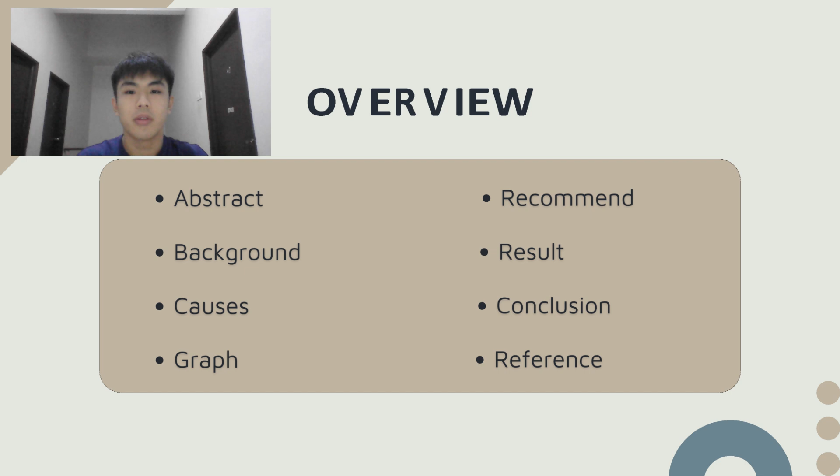Let me briefly explain our report on the I-35W Bridge collapse in 2007. The main causes were weak gusset plates, lack of backup support, too much weight for repairs, and poor maintenance.

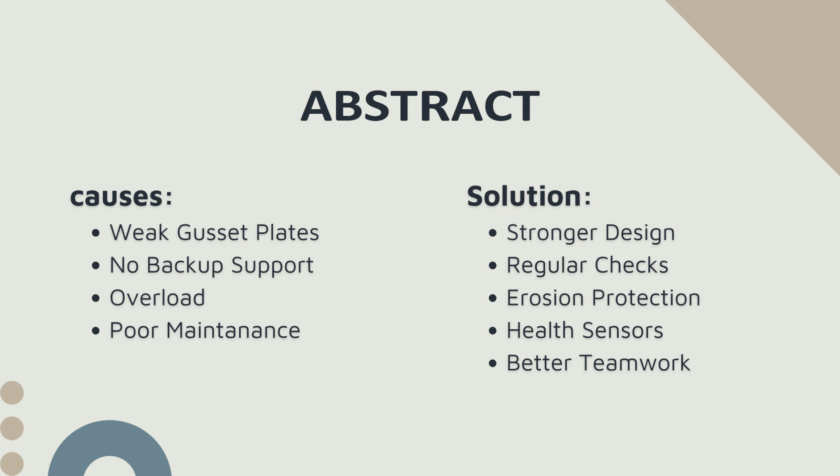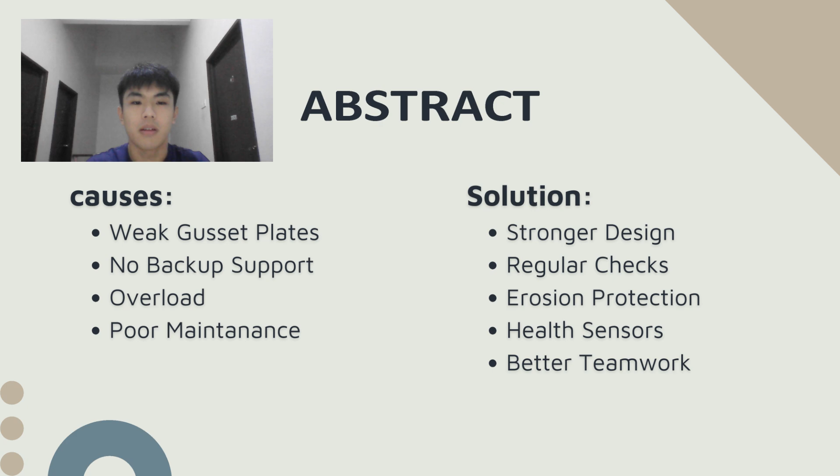To prevent similar failures, we recommend a few key solutions. First, use stronger and safer structural design. Second, perform regular inspections to catch early signs of damage. Third, protect bridge foundations from erosion and install sensors to monitor bridge health in real time. Lastly, improve teamwork between agencies for better decision making.

Highway bridges are essential to modern transportation systems. They must remain in static equilibrium under different types of load, such as dead load, live loads, environmental loads like wind or temperature change, and sometimes even construction load. If these forces are miscalculated or misplaced, the bridge structure can become unbalanced and fail.

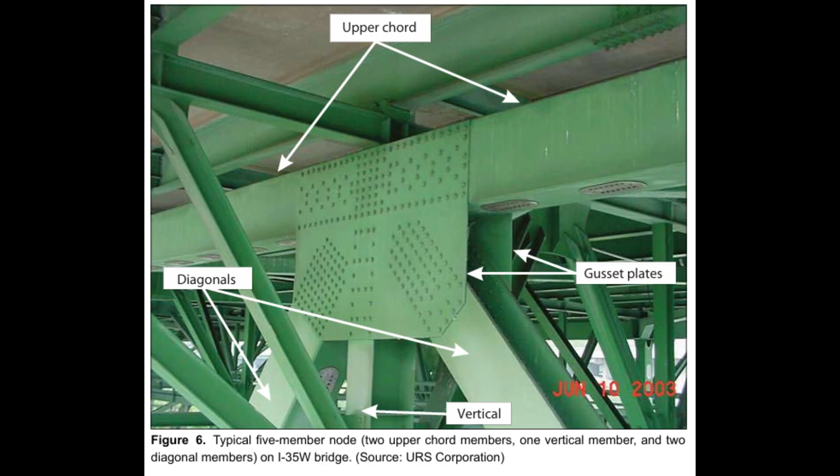A tragic example is the Interstate 35W Bridge collapse in Minneapolis on August 1, 2007. This steel deck truss bridge was 1,907 feet long and carried 8 lanes of traffic. It served over 140,000 vehicles per day, making it Minnesota's third most used bridge.

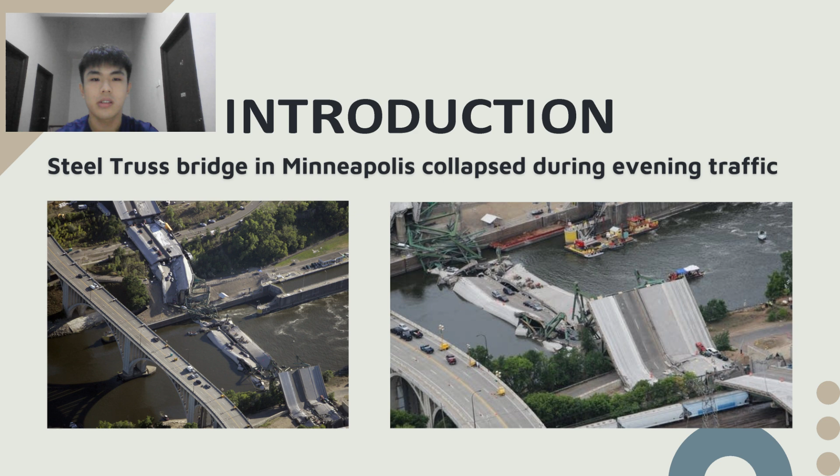On the day of the collapse, a construction crew had closed 2 lanes and placed heavy materials like sand and concrete on the deck for repairs. This added weight, combined with live traffic and the bridge dead load, caused excessive force at a critical joint known as U10.

This joint had undersized gusset plates, only 0.5 inches thick. Due to a design error, when overloaded, this point failed.

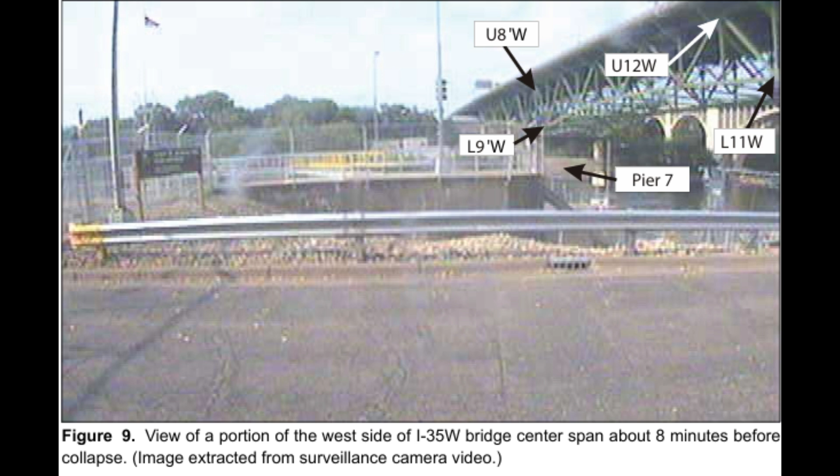At 6:05 p.m., during evening traffic, 456 feet of the main span collapsed from a height of 108 feet, sending 111 vehicles into the 15-foot deep Mississippi River. The disaster caused 13 deaths and 145 injuries.

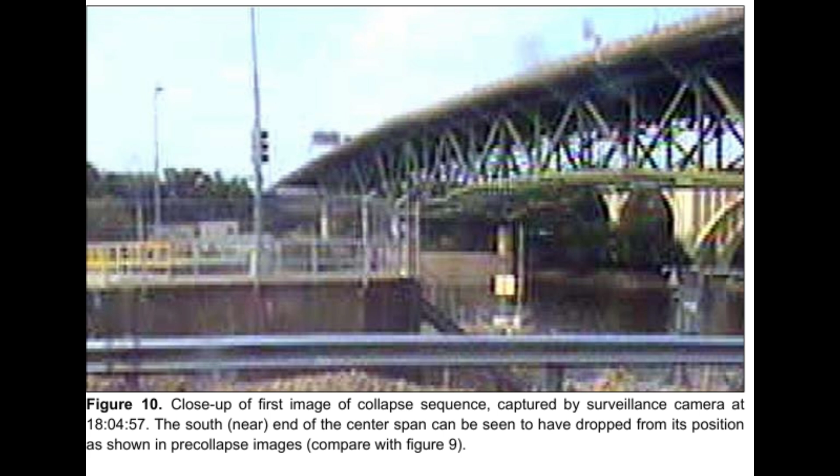According to the National Transportation Safety Board, the main cause was insufficient gusset plate capacity, made worse by the added construction load. It violated basic static principles—the force and moment were no longer balanced.

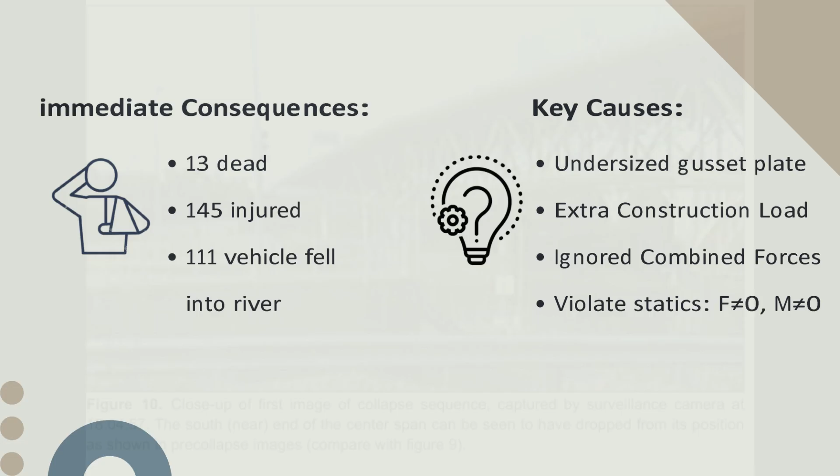The collapse showed how a small design mistake in one joint can trigger the failure of the entire structure. It taught engineers the importance of correct free body diagrams, accurate force calculation, and maintaining safety margins in all structural design. Most importantly, it highlighted how theory and static calculation must be applied carefully in real-world engineering to avoid future tragedies.

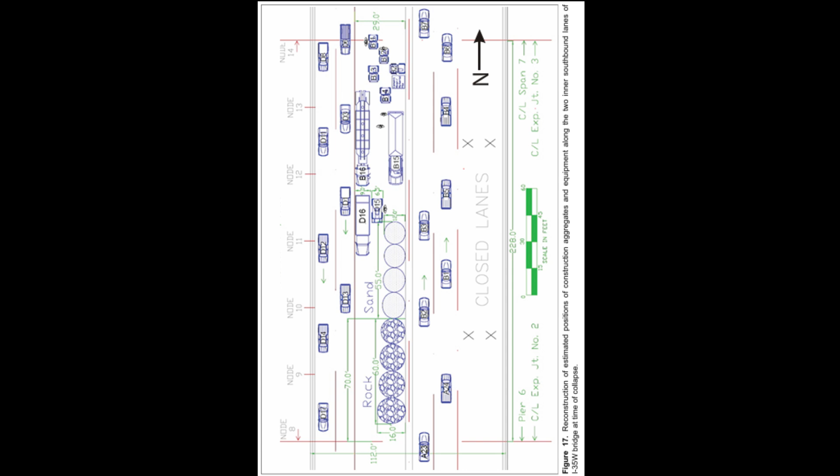Based on this case, our report focused on 3 main engineering scopes. First, to review the original load case, including the dead load, live traffic, and construction materials. Second, to analyze the critical joint U10 using statics principles like free body diagrams and equilibrium equations.

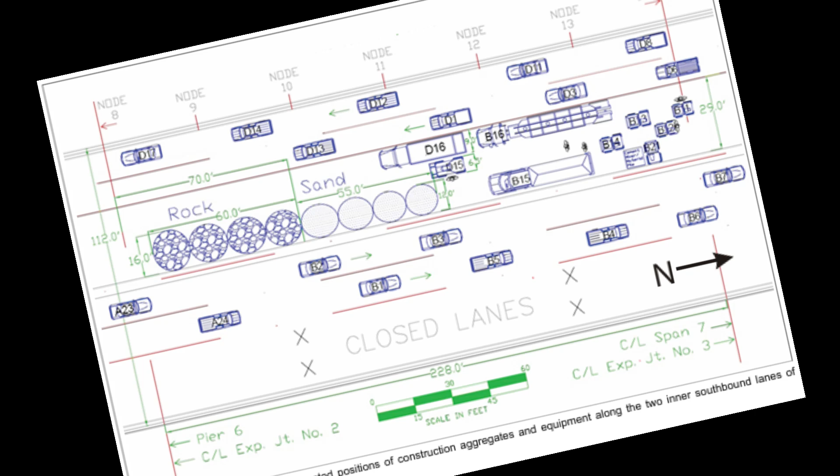Finally, to propose improvements using stronger gusset plates, better load distribution, and regular inspection protocols to ensure every joint is satisfied: total force equals 0 and total moment equals 0. By achieving this goal, we can help prevent similar failures and improve the safety and lifespan of future bridge designs.

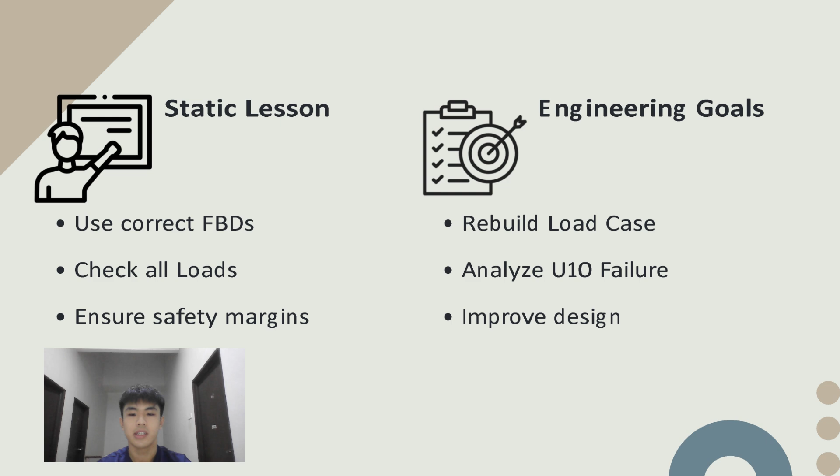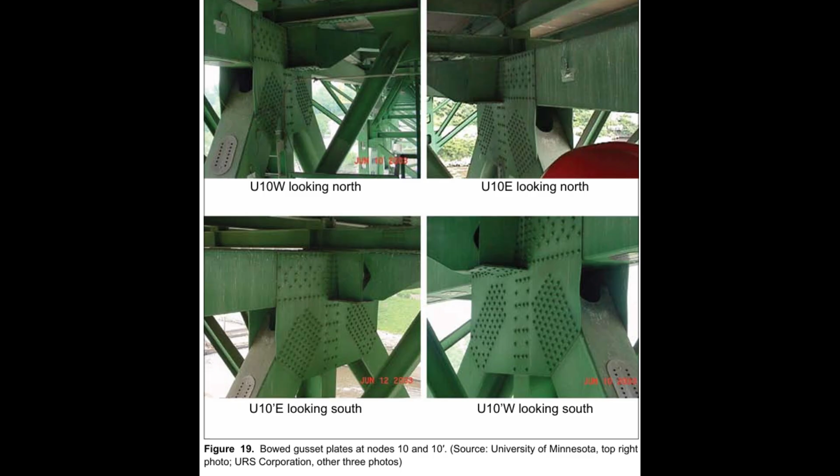The bridge collapse was triggered by long-standing design issues combined with increasing load over time, and the most critical flaw is actually the undersized gusset plates at node U10, which were only half the required thickness. These gusset plates play a key role in holding the truss together by transferring forces between members.

Under normal conditions, they were already overburdened with axial and bending forces. Over the years, the bridge dead load increased substantially due to renovations, such as a thick concrete overlay in 1977 and a heavy median barrier in 1998.

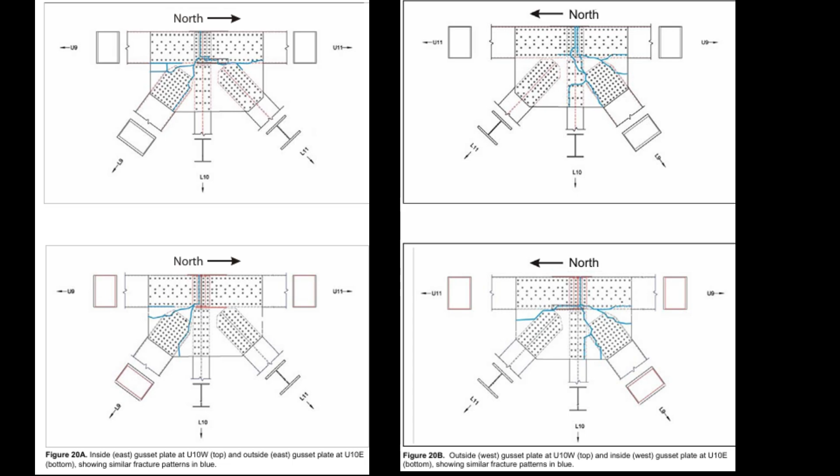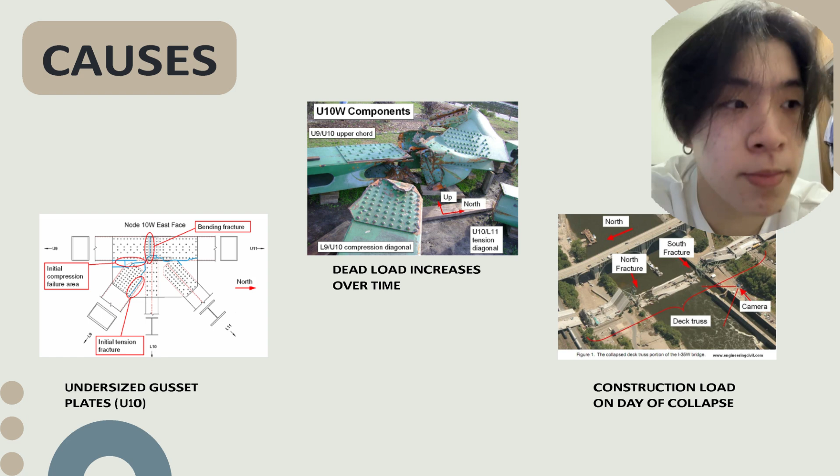These modifications were added without re-evaluating the structural capacity, which then, on the day of the collapse, temporary construction equipment and materials added over 500,000 pounds of concentrated weight directly over the already compromised U10 gussets, which acted as the final overload condition.

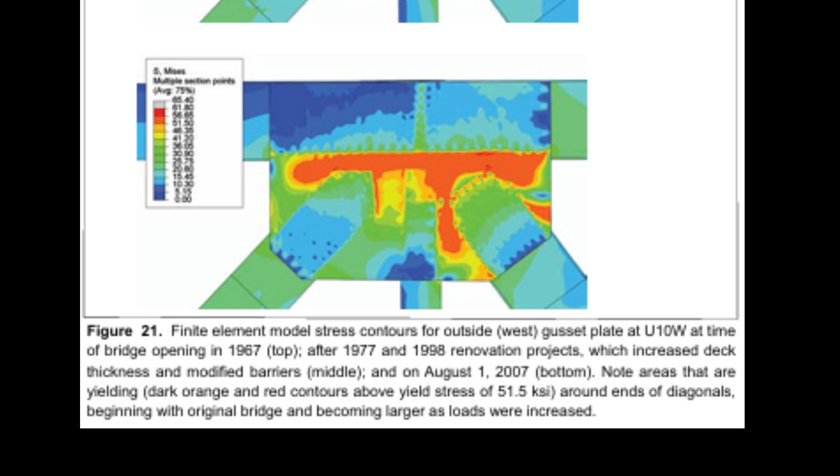The final failure involved more than just load—it was a breakdown in structural equilibrium. One overload factor was frozen bridge bearings, which blocked the bridge's natural expansion in hot weather. This added extra axial force into the truss system, which particularly affected already stressed gusset connections.

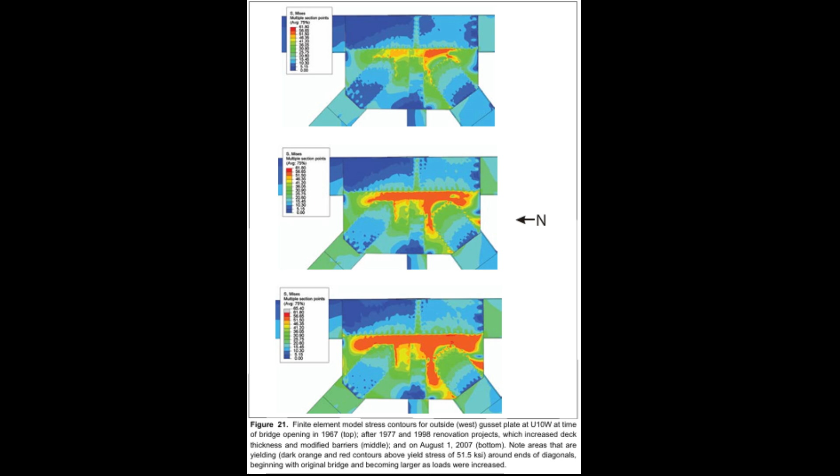When the U10 gussets fractured, the bridge lost its internal balance. Load that was already evenly distributed rapidly shifted to adjacent members, including L9 and U10W, which then buckled laterally due to increased compression.

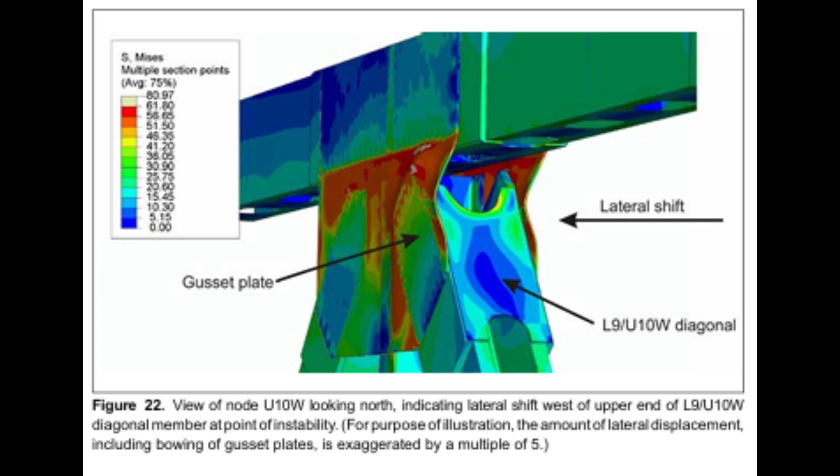From here, the bridge entered a state of dynamic instability, collapsing within 4 seconds. The failure shows how the combination of design oversight, cumulative loading, and impaired equilibrium can have catastrophic consequences when not addressed in time.

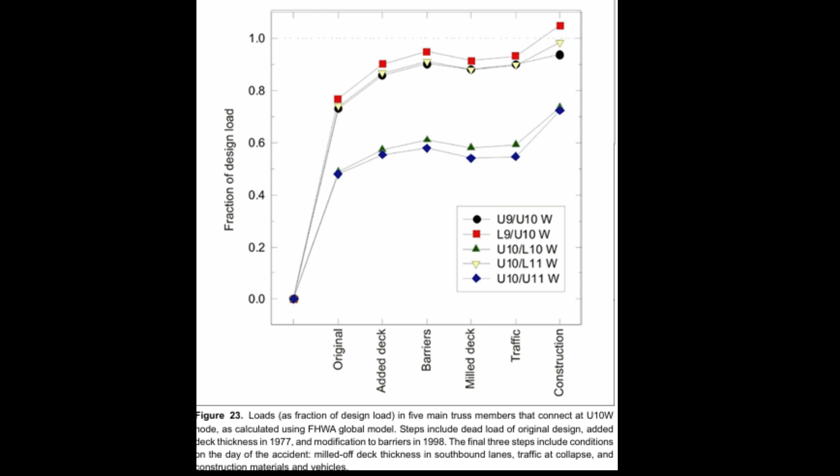First, we have overloading. During maintenance, around 580,000 lbs of construction materials were placed directly over the bridge's weakest point, the U10 gusset plates. This means the bridge couldn't handle the localized stress.

Next, thermal restraint played a role. Corroded bridge bearings froze in place, preventing the steel structure from expanding under the summer heat. This caused additional compressive stress on already vulnerable joints.

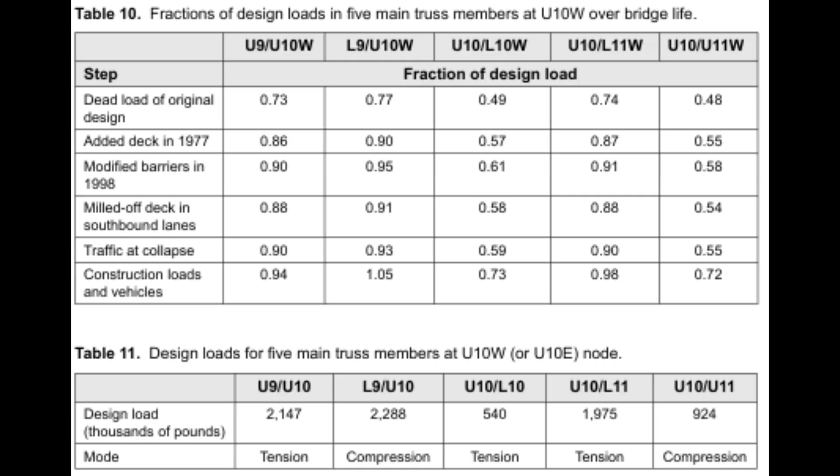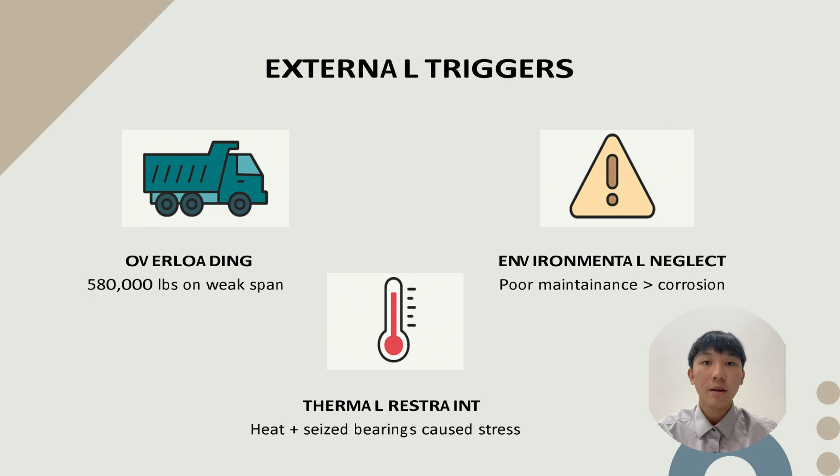Lastly, environmental neglect. The bridge had visible corrosion and aging components, but maintenance and upgrades were not prioritized, further weakening structural integrity over time. Now let's look at the internal systematic oversights.

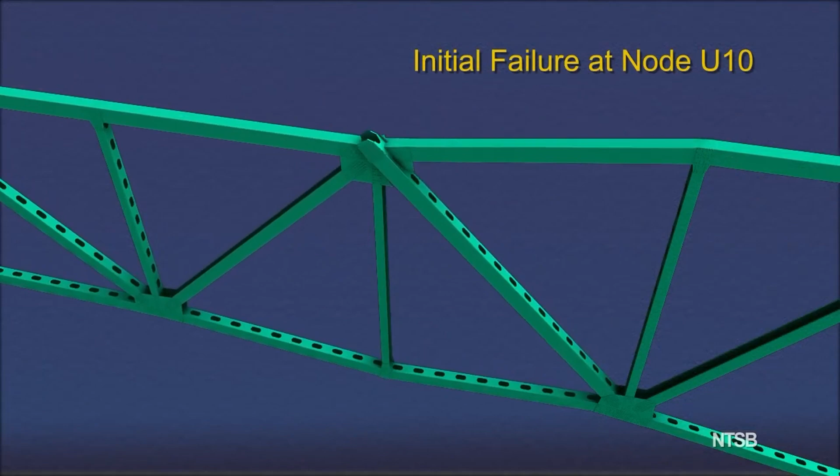The core issue was a design flaw. The gusset plates at key joints like U10 were too thin from the beginning, just half the thickness they should have been. With no redundancy in the design, one failure cascaded into a full span collapse in under 4 seconds.

Secondly, inspection and regulation gaps allowed problems to go undetected. Over the years, the bridge load increased by 20%, but no revaluation of the gusset plates was ever conducted. Standards at the time didn't require it.

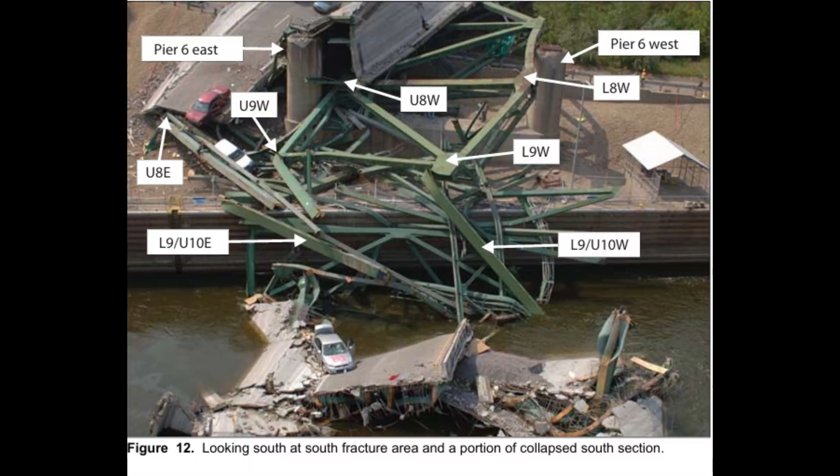Lastly, there was a lack of structural monitoring. No real-time sensors or warning systems could alert engineers about rising stress or fatigue in critical parts of the bridge.

Now I'm going to talk about some recommendations for the truss bridge disaster.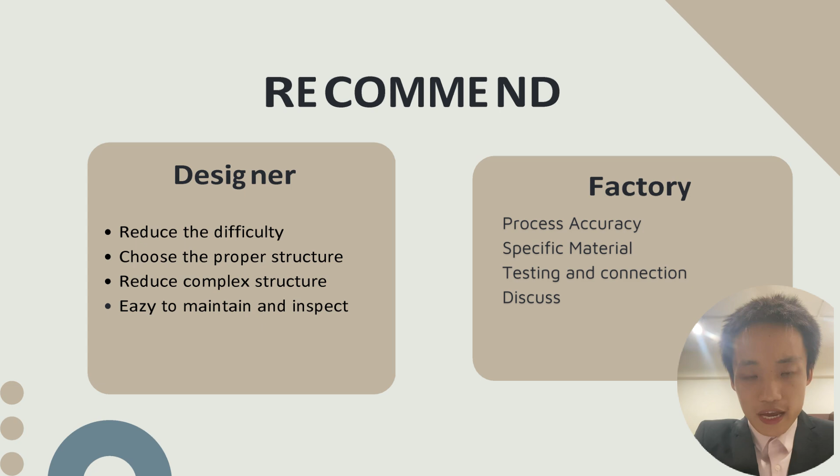First of all, we need to detect and correct issues before the design is finalized. Secondly, we should verify and calculate the appropriate design before we perform this project.

Thirdly, based on this, the U10 gusset failure is based on corrosion. Maybe we need to detect potential corrosion in the future.

The second part, I'm going to talk about how to connect with the administration and institute training courses for engineers. First of all, we need to update National Highway Institute training courses.

Secondly, we need to do some revision to the reference materials.

After that, we also need to work with the highway administration to develop and implement pre-design quality standards.

Also, the manual for bridge evaluation, including the capacity of gusset plates, should be part of the load rating for non-load-path-redundant truss bridges.

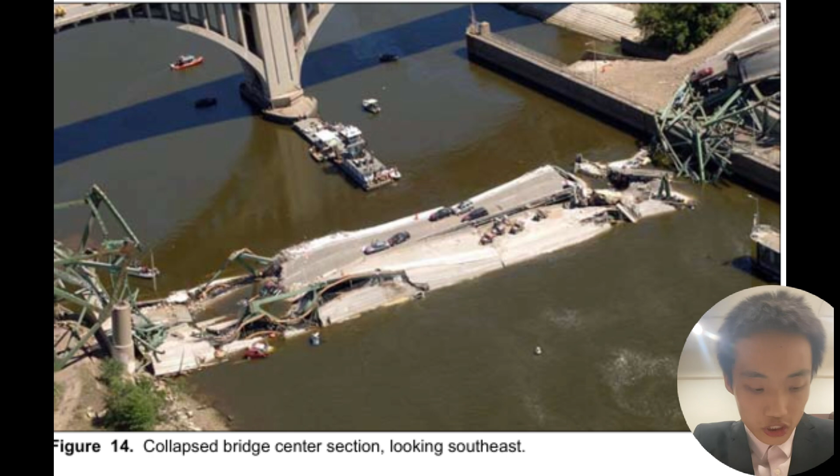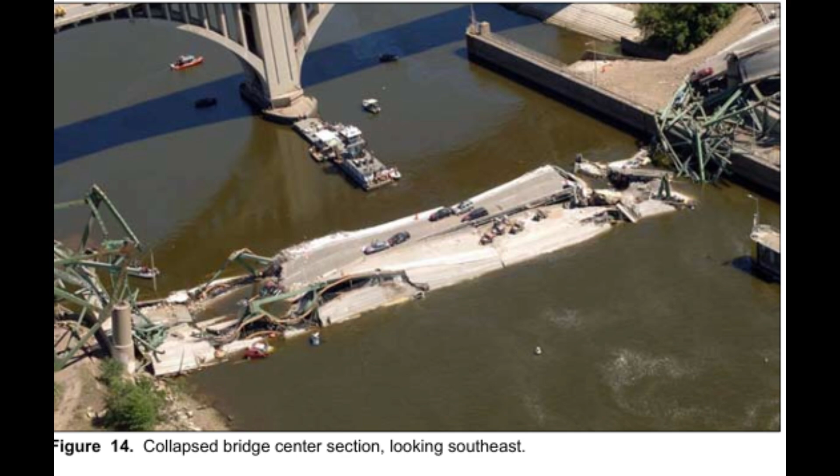We also need to update the manual for bridge evaluation, which is a very important chain in the manufacturing process. Finally, for the construction part, we need to ensure raw materials placed on the construction or maintenance project do not overload the structure members or their connections.

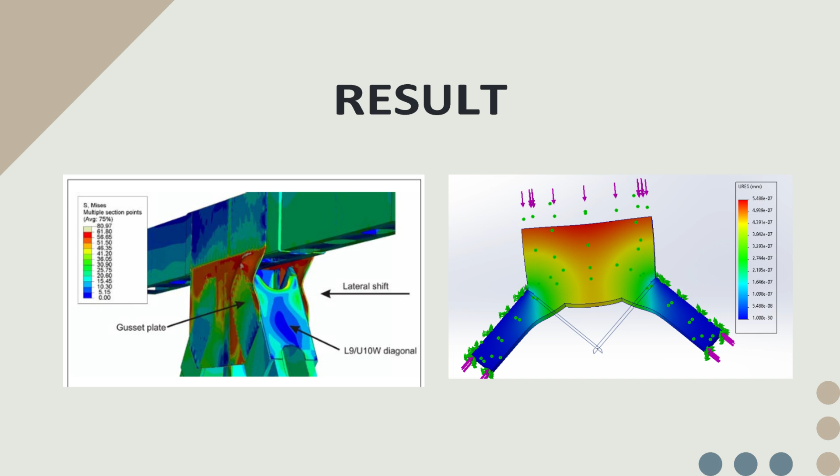Because construction members need time to figure everything out, we need to give enough time to finish the project.

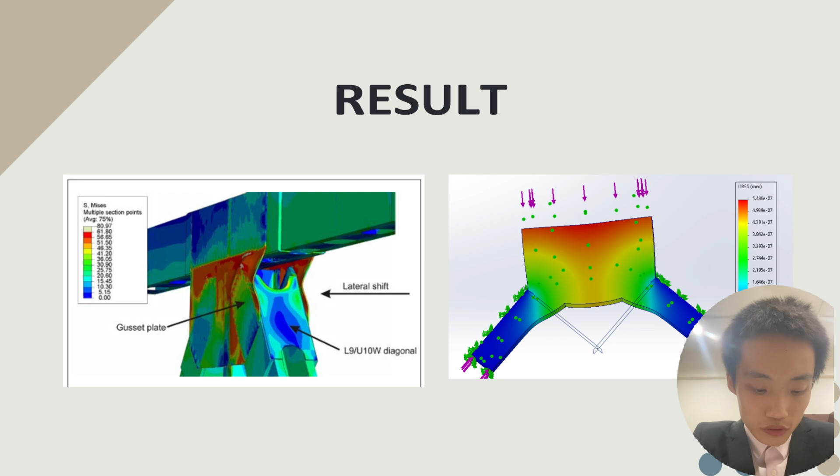Finally, to recap: we need to recognize and respond to potential damage, and revise the AASHTO guide to incorporate new information. I hope this kind of disaster will not happen in the future.

And that people work together to achieve more valuable and implement designs with more quality and safety.

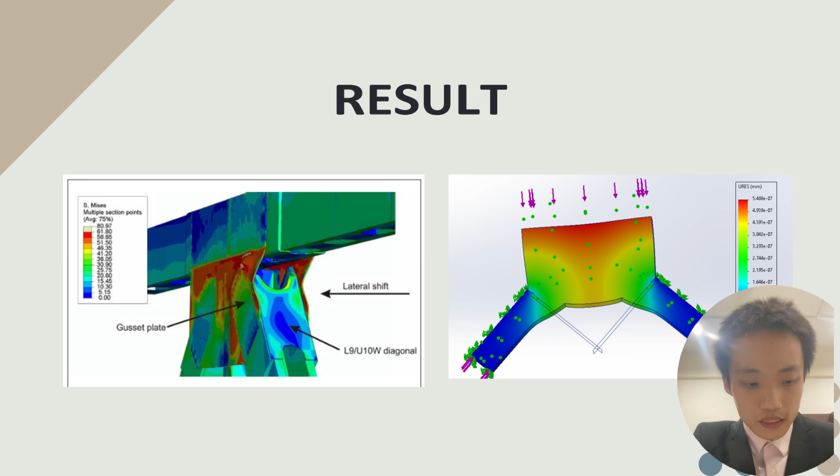That's all, thank you. Summing up, the Interstate 35W Bridge accident wasn't just an accident.

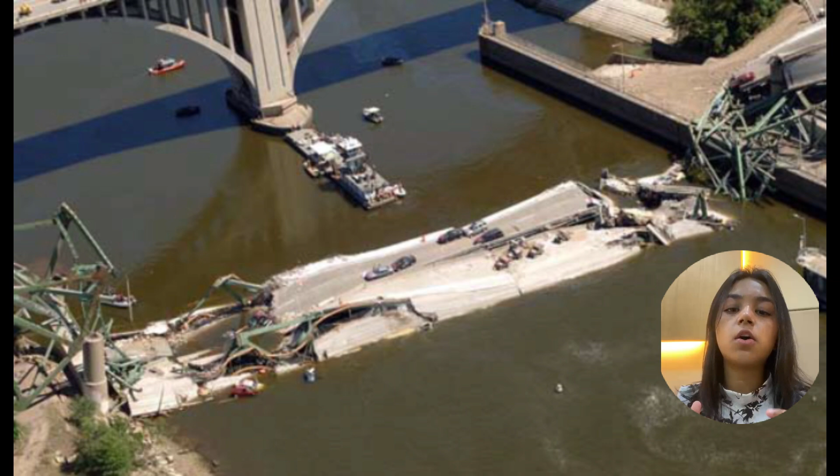It was a tragic engineering failure caused by inadequate inspection and maintenance, and also by applying theoretical calculations in real life without considering real-life factors like temperature change and fluctuating loads, which eventually caused this bridge to collapse as the force and moment weren't in equilibrium anymore.

So this tragic accident was, in fact, an engineering failure, which is why future engineers need to be careful to avoid this kind of failure for public safety.

In the future, to avoid this kind of failure, we must keep our designs simple, which is easier to calculate and easier to maintain, and we must also be careful to use the best materials for our design, as materials have a very significant impact on our designs.